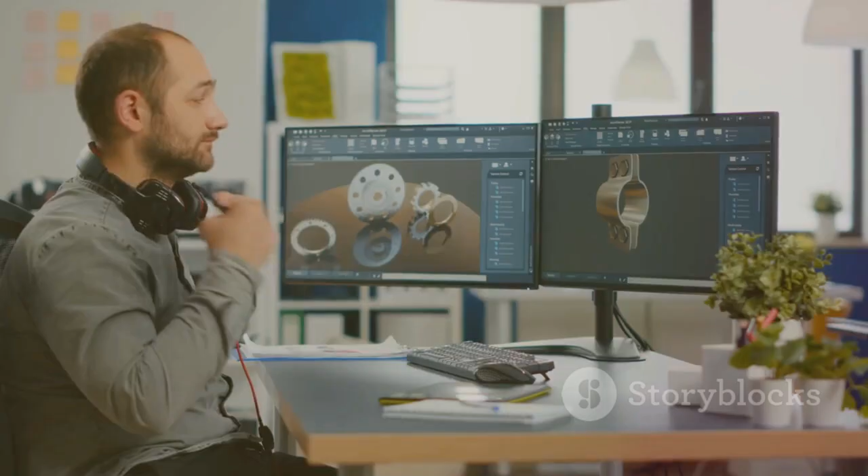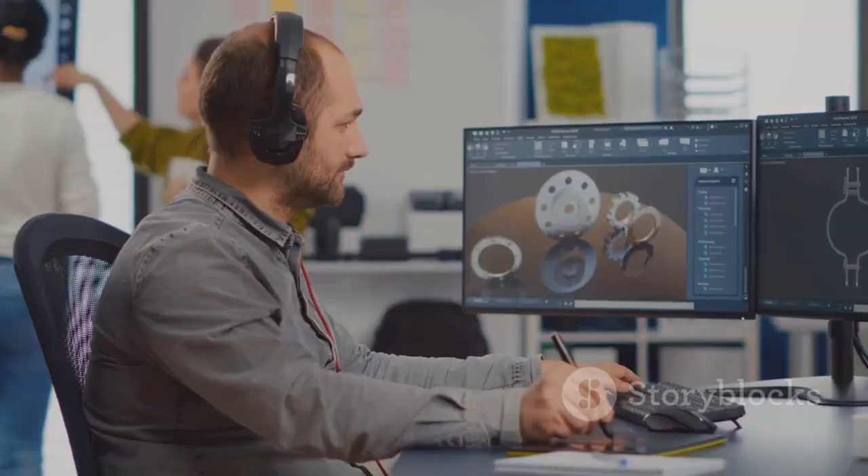Have you ever designed something cool on your computer and wished you could hold it, see how it feels, or even use it? That's where CNC machining comes in. It's the bridge between your imagination and the real world. But before your idea can become a real part, you need a manufacturing drawing.

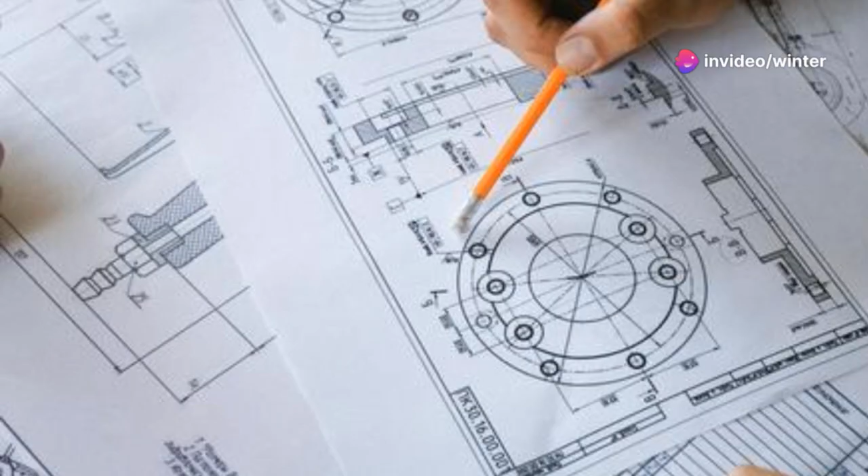Think of it as the universal language that connects you and the machinist, making sure your vision is understood exactly as you intended. Without a clear, detailed drawing, you're just guessing, and so is the machinist. That can lead to mistakes, wasted time, and parts that don't work.

This guide is designed for beginners, students, hobbyists, inventors, or anyone who's ready to turn digital designs into real, functional parts. We'll break down the process step by step, starting from your 3D model and ending with the final PDF drawing you'll send to the machine shop. You'll learn how to lay out different views, add precise dimensions, and include all the notes and details machinists need to make your part exactly right.

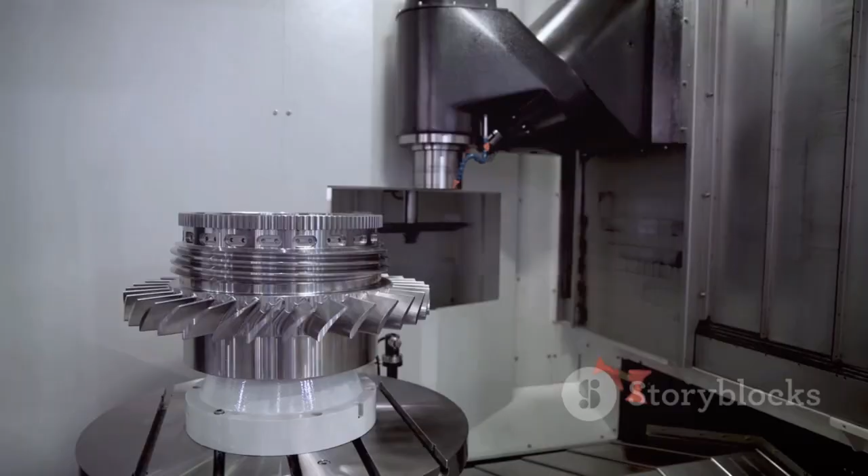By the end of this guide, you'll have the confidence and skills to create clear, complete, and professional manufacturing-ready drawings. Mastering this skill opens up a world of making. Suddenly, your digital dreams can become real objects you can use, share, or even sell. So grab your CAD software, get comfortable, and let's get started on this exciting journey together.

Remember, every expert was once a beginner. Mistakes are just learning opportunities, and every error brings you closer to mastery. Let's dive in and make your very first professional blueprint. Your journey to making real parts starts now.

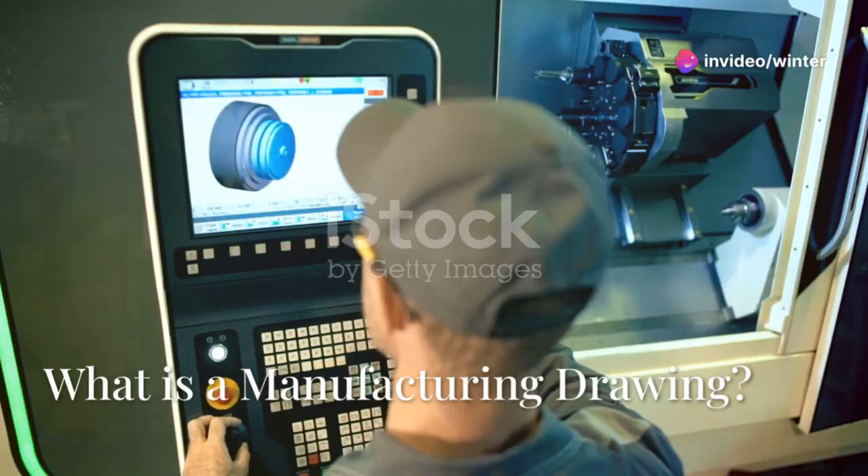What is a manufacturing drawing? It's more than a picture. It's a contract that tells someone exactly how to make your part. It includes shape, size, material, and any special treatments. CNC machines are precise, but they need clear instructions. Your drawing is their guide.

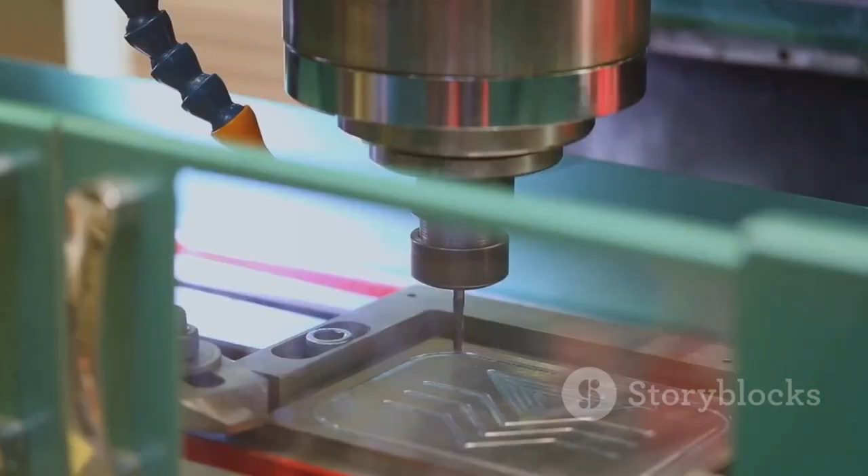If your drawing is unclear, the machinist has to guess, which wastes time and money. A good drawing removes all guesswork, ensuring you get exactly what you designed. Think of it as a recipe. Every detail matters, from material to exact hole size.

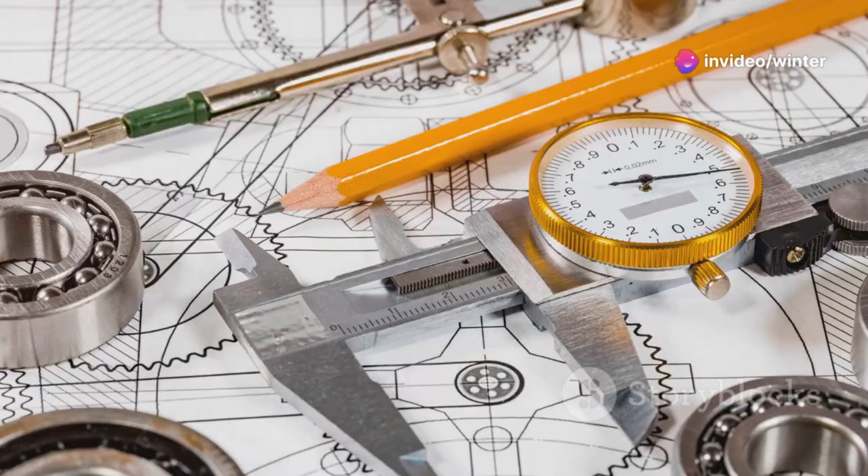Drawings follow standards, a universal language machinists everywhere understand. By learning these standards, you're learning to communicate in the world of manufacturing. This skill is valuable no matter what you plan to build.

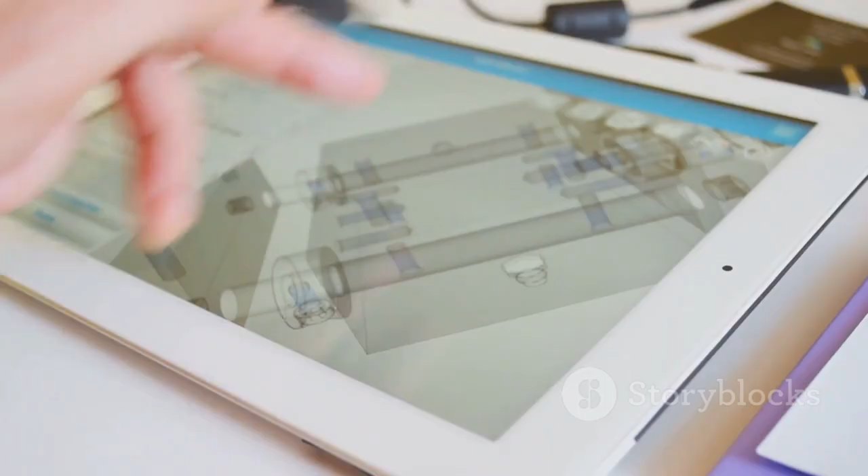Before you start a drawing, your 3D model must be complete and accurate. If the model is wrong, everything else will be too. Double-check every feature. Holes, fillets, dimensions, nothing should be left undefined. Make sure your model is fully constrained so it won't change accidentally. Use your CAD software's tools to check for errors or weird geometry. A clean, robust model makes the drawing process smoother.

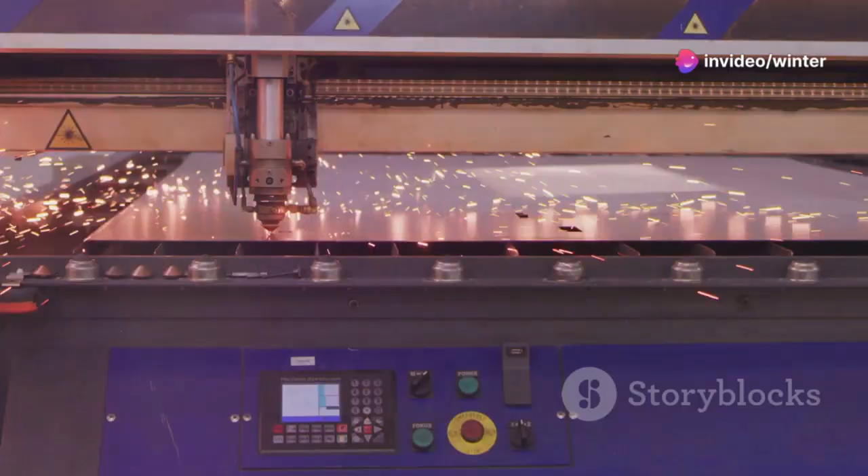Think about manufacturability. Can tools reach every surface? Are inside corners machinable? Design for manufacturability saves time and money. Great designers think about how parts will actually be made.

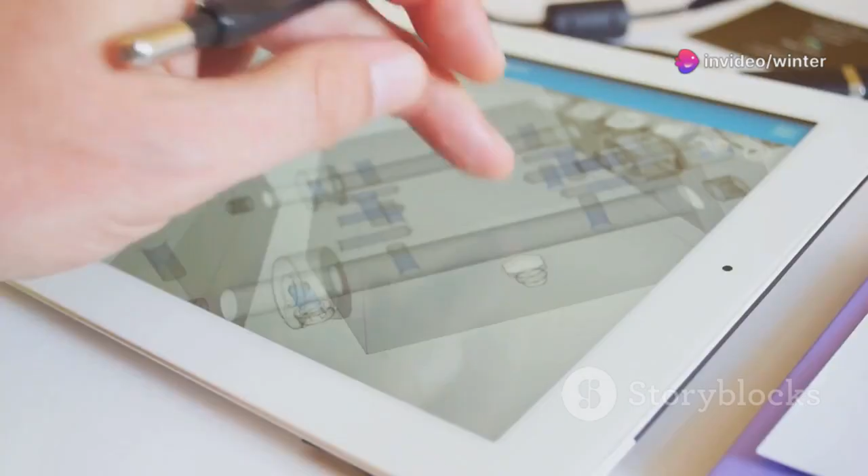With your 3D model ready, it's time to start a new drawing in your CAD software. This is the foundation for communicating your design clearly and professionally. Choose a sheet size that fits your needs. A3 or A4 is usually best for small to medium parts, offering enough space for details without being overwhelming.

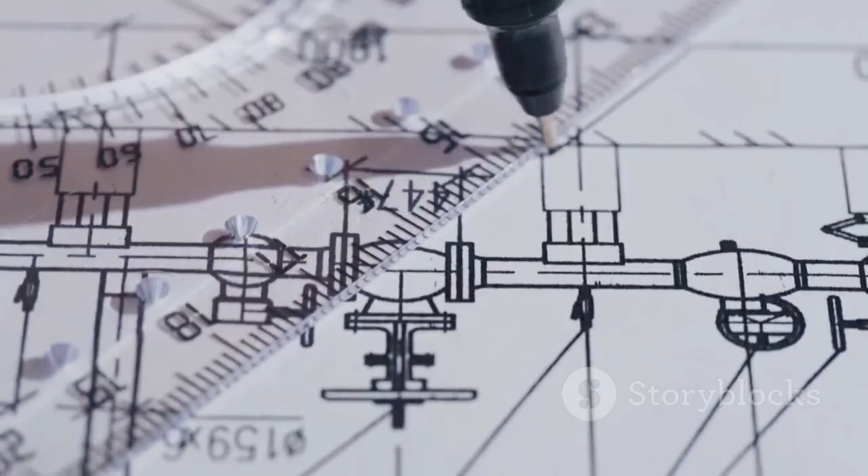Use a standard template that includes a title block. This is where you'll enter key information like the part name, part number, material, who drew it, and the date. Keeping this info accurate is essential for tracking and collaboration. Next, select your 3D model to place on the drawing sheet. This links your design to the drawing and ensures accuracy.

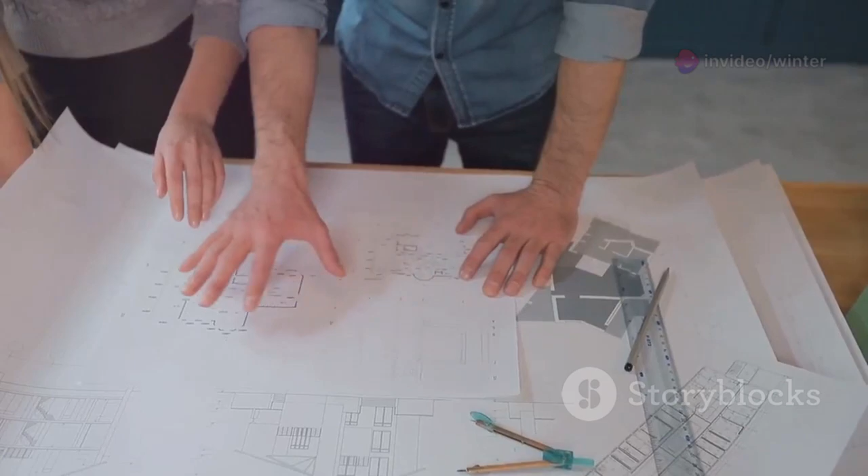Before adding any views, take a moment to plan your layout. Think about how to arrange views for maximum clarity and logical flow, so anyone can understand your drawing at a glance. Check your projection standard. Third angle is standard in North America, while first angle is used in Europe and many other regions. This choice affects how your views are displayed.

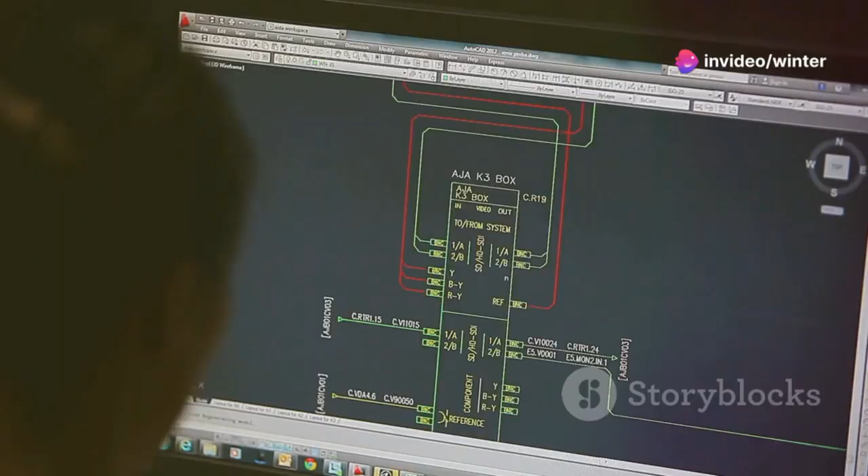Set the projection method correctly and make sure it's clearly noted on your drawing, usually in the title block or a dedicated symbol. The projection standard determines how your views are arranged on the sheet, so double-check this to avoid confusion. A well-organized sheet with clear labels and logical structure makes everything easier to read and reduces mistakes during manufacturing or review. Don't skip these basic setup steps.

They set the stage for a professional, effective drawing that others can trust and use. Now you're ready to start placing your views and building out the rest of your drawing.

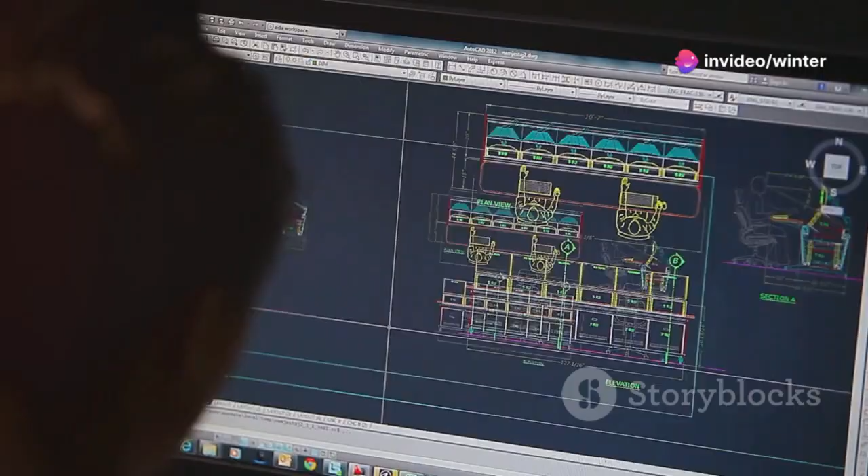Now it's time to place your part's views on the drawing sheet, a crucial step in making your design easy to interpret. Always begin with the base or front view. Choose the orientation that best displays the most important features and details of your part, as this will serve as the foundation for the rest of your drawing.

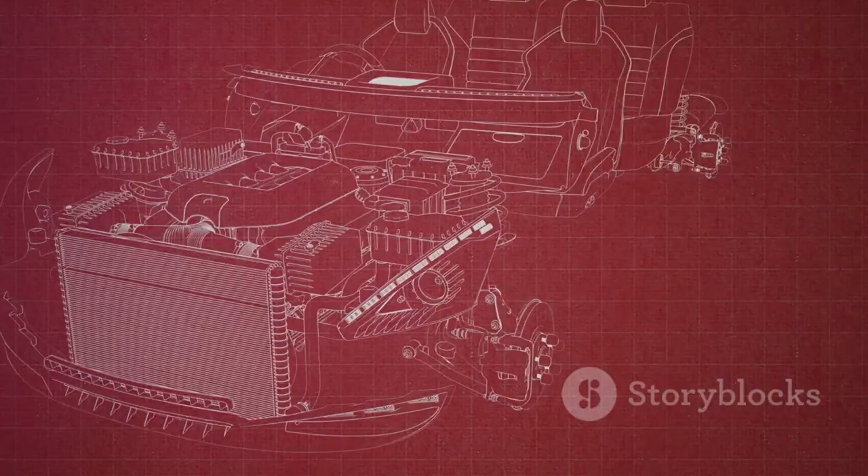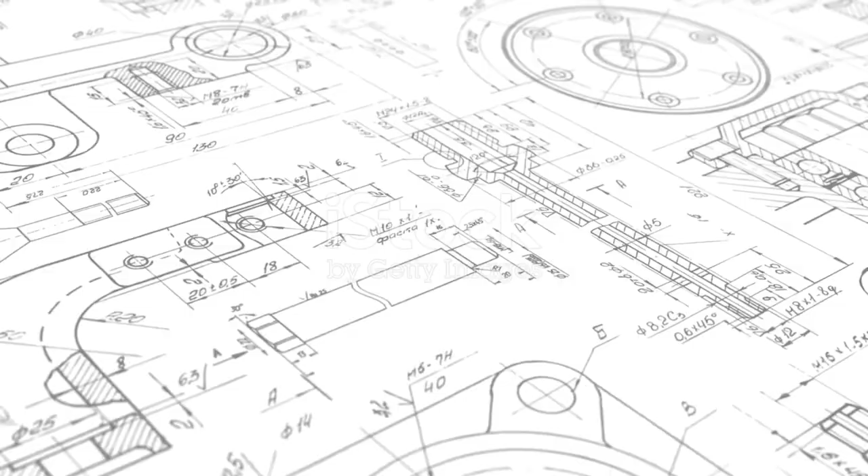Place this front view in the bottom left area of your drawing sheet. This strategic placement leaves plenty of space for projecting additional views, ensuring your layout stays organized and readable. Next, use your CAD software's projection tools to add the top and right side views. This follows the third angle projection method, which is the standard in many industries and helps others quickly understand your design intent. Only include the views that are absolutely necessary to show all the features of your part.

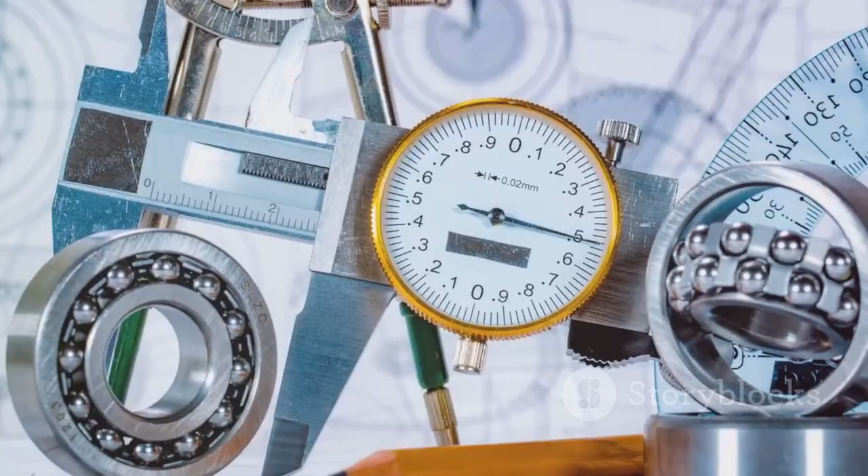Adding extra, redundant views can clutter the drawing and make it harder to read. Remember, clarity is always the main goal. If a feature is already clear in 2 views, there's no need to add a third. Fewer, well-chosen views make your drawing more efficient and easier to interpret.

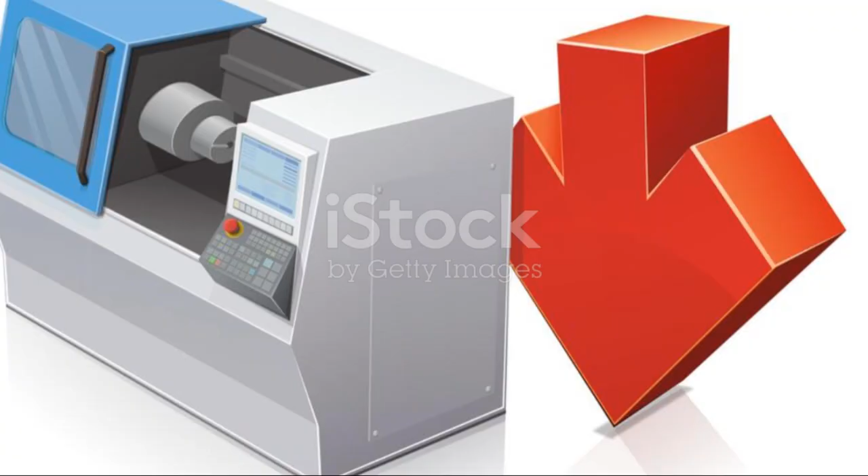Always include an isometric view in the top right corner. This 3D reference helps anyone looking at your drawing quickly visualize the overall shape and form of the part. While the isometric view isn't used for dimensions, it's extremely helpful for machinists and fabricators to understand how the part should look when finished. A clear, well-organized layout bridges the gap between your 2D drawings and the real 3D part, making manufacturing and inspection much smoother.

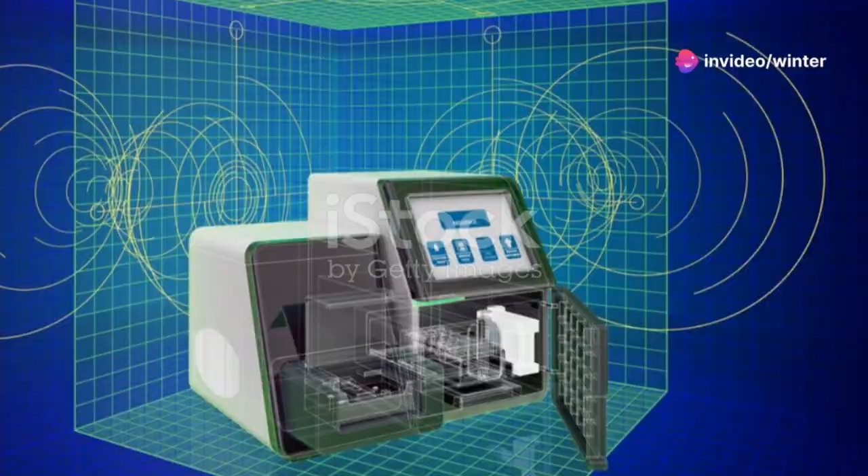Keep your drawing simple, focused, and free of unnecessary details. A clean presentation is always more effective. Choosing the right views and arranging them thoughtfully makes your technical drawing easy for anyone to understand and use.

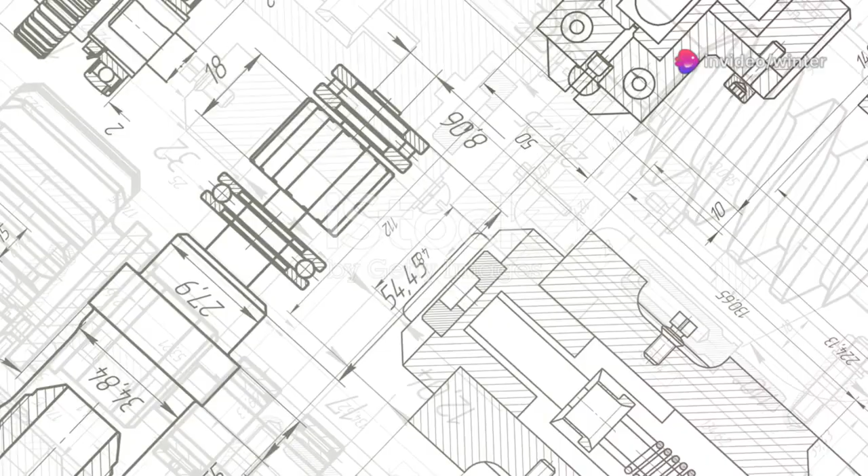Sometimes standard views aren't enough. Complex internal features can get lost in hidden lines. Use sectional views to cut the part and reveal the inside, turning hidden lines into clear, solid ones. Draw a cutting line and your CAD software generates the section view with hatching for solid areas.

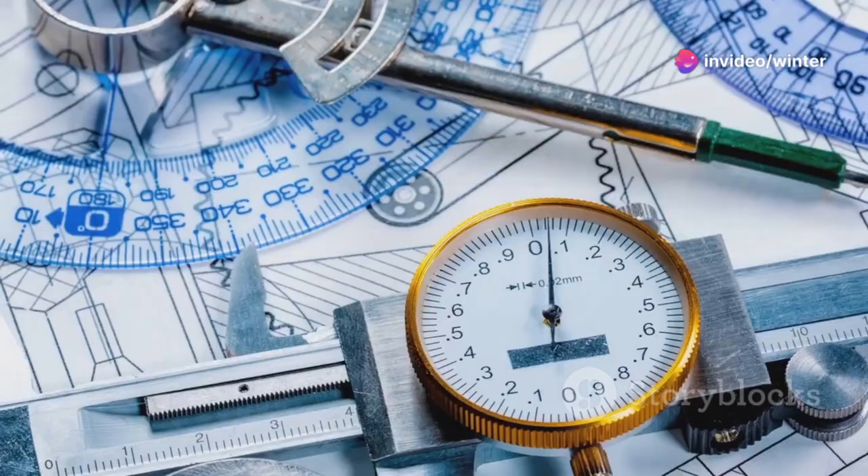For tiny, important features, use detail views. Zoom in on a small area for clarity. Label and scale detail views so dimensions are easy to read. Sectional and detail views show you care about clarity. They make life easier for the machinist. Clear drawings lead to correctly made parts.

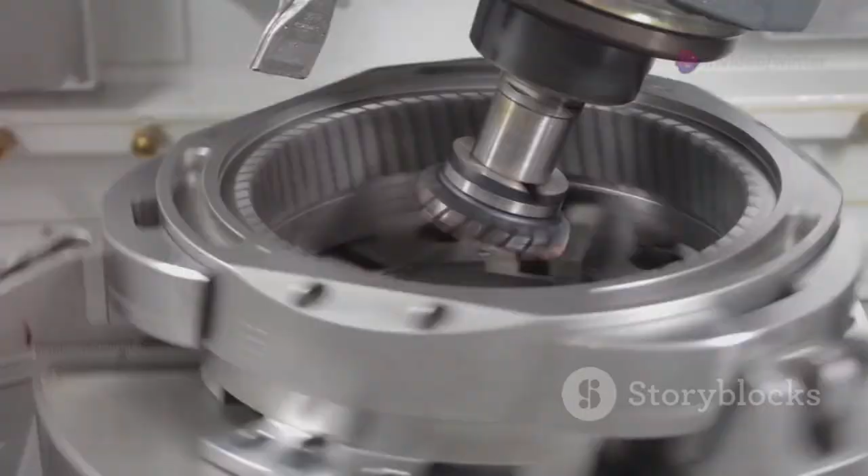Now add dimensions, the most critical step. Dimensions tell the machinist exactly how big and where every feature is. Only provide the dimensions needed to make the part. Don't over-dimension. Start with overall width, height, and depth, then work inward to features. Use common datums, edges, for consistency.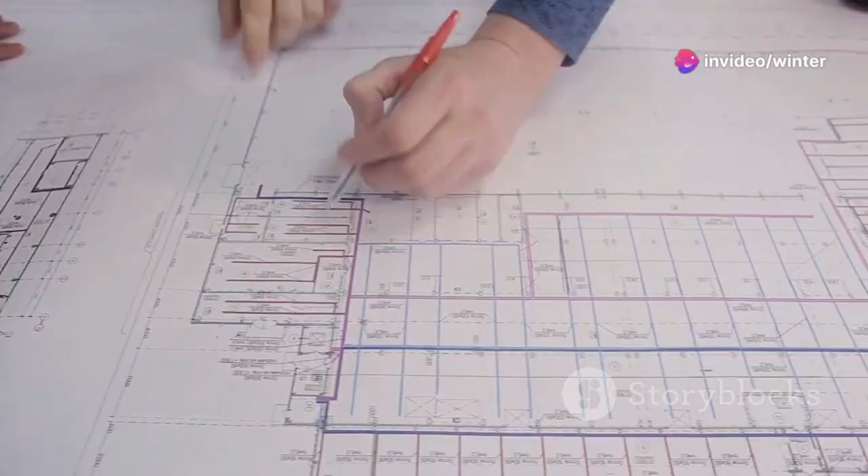Keep dimensions neat, organized, and avoid crossing lines. Use CAD tools to align and space dimensions for readability. If a view is crowded, use a detail view. For holes, specify diameter, depth, and thread type if needed. For repeated features, dimension 1 and note how many times it repeats. Clarity and precision are key. A clean drawing is a professional drawing.

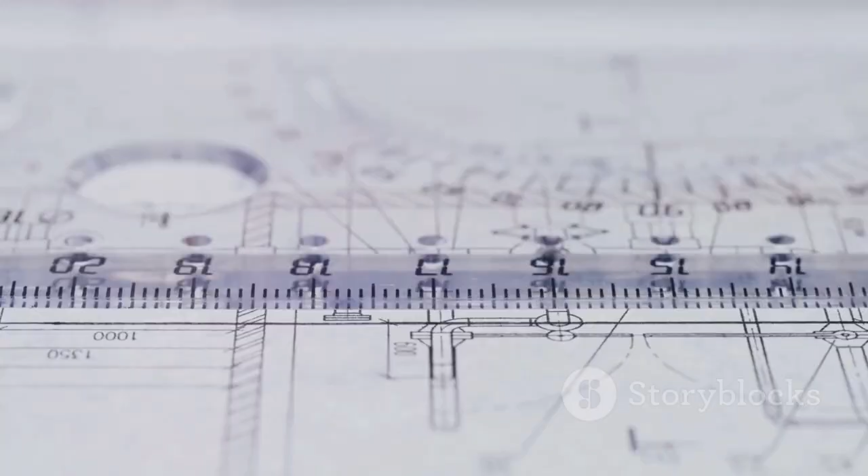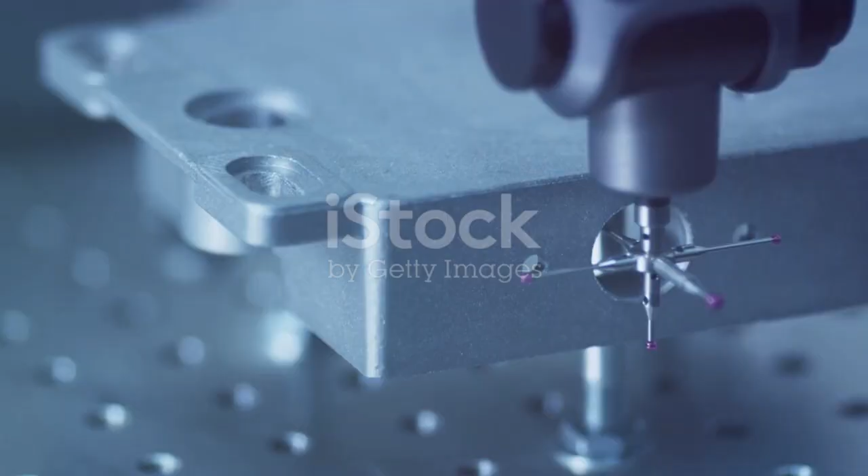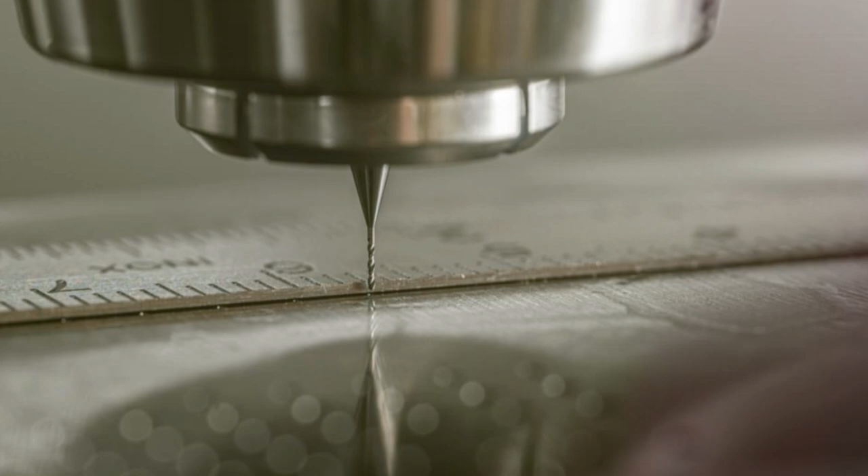Next, add tolerances, materials, and finishes. Tolerances define acceptable variation. No part is made to an exact number. Add tolerances directly to dimensions or as a general note in the title block. Use tighter tolerances only where needed. Precision costs money. For advanced control, learn about GD&T, geometric dimensioning and tolerancing.

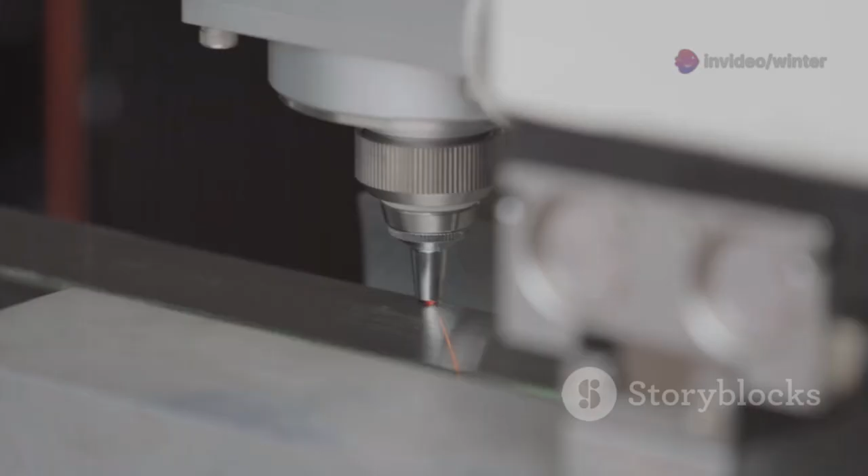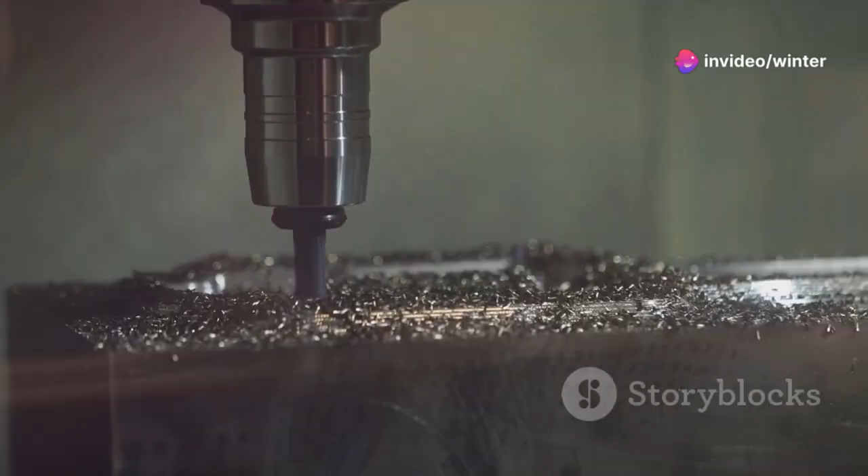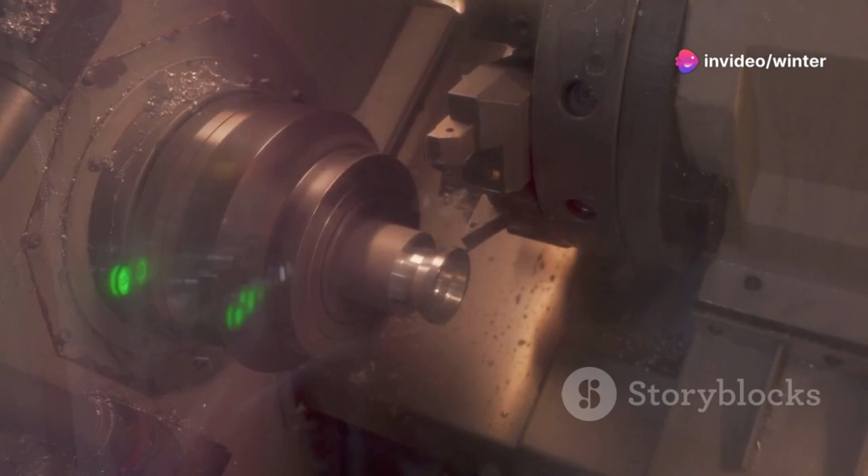Always specify the material. Be exact about alloy or plastic type. Material affects strength, weight, and machinability. Don't forget surface finish. Some areas need to be smooth, others can be rough. Indicate finish with the proper symbol and roughness value. General finishes can go in the title block, special ones on the drawing. Missing this info leads to costly mistakes. These details ensure your part is made right. Don't leave them out.

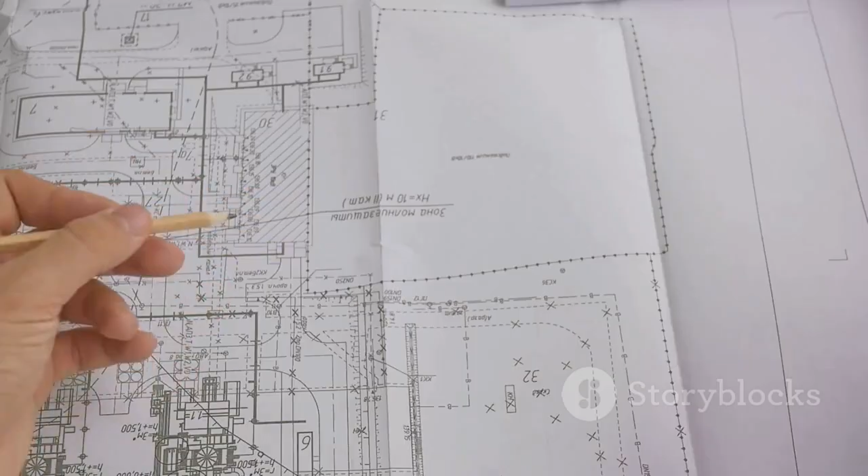Last step, review and export. Fill out the title block. Part name, number, material, tolerances, your name and date. Use the revision block to track changes. Update it every time you revise the drawing. This prevents manufacturing outdated parts.

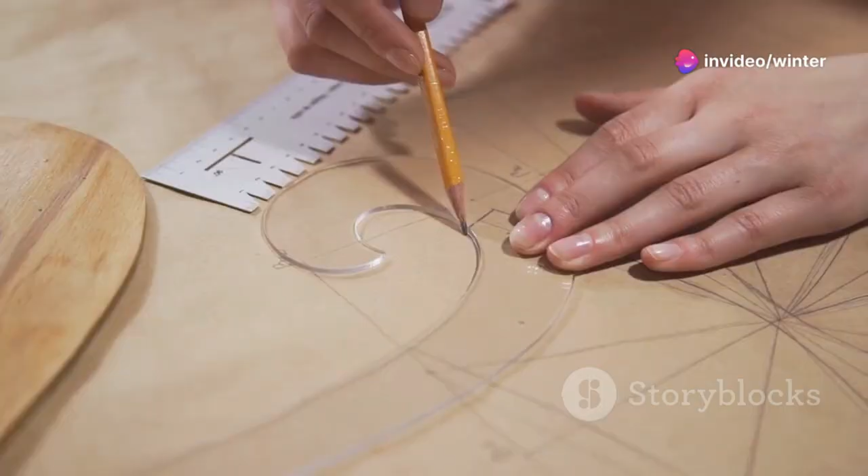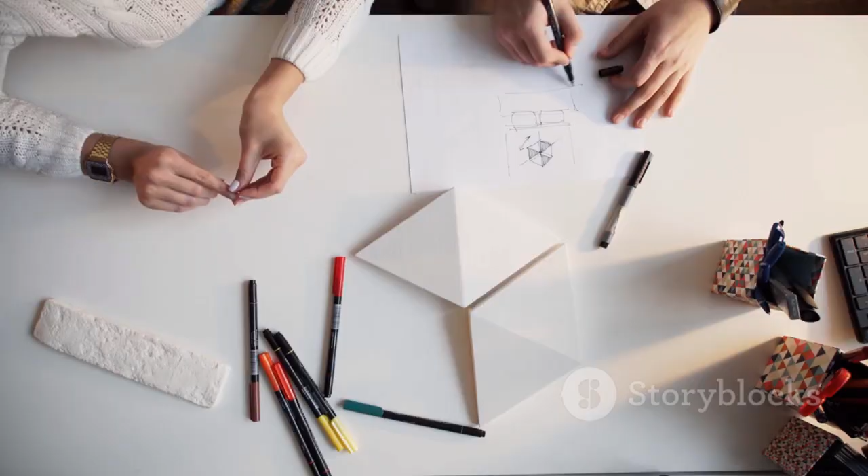Review your drawing as if you're the machinist. Check for missing info, errors, or unclear details. Print it out to spot mistakes you might miss on screen. Get a second set of eyes if possible. When you're confident it's complete, export as a PDF. Name the file clearly with part number and revision. Now you have a professional CNC-ready drawing. Congratulations, your design is ready for the real world.